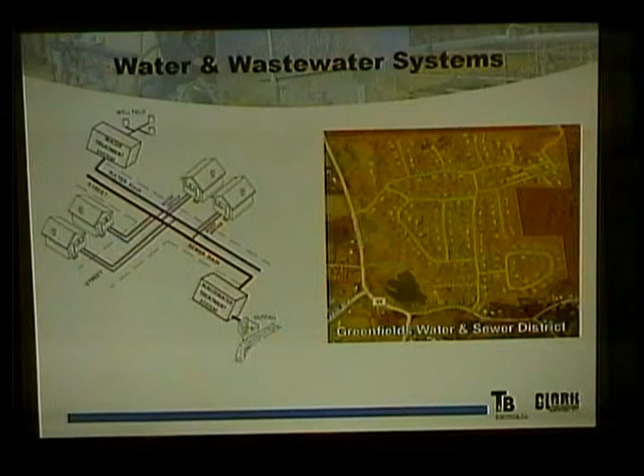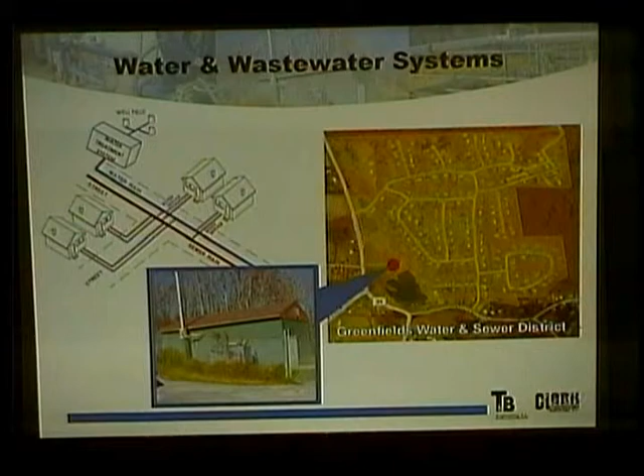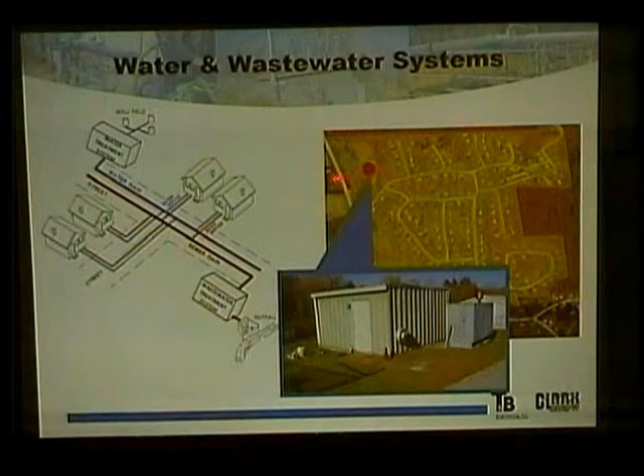Your water treatment building itself is located right off of Cream Street here. For the wastewater collection system, it includes a series of pipes that bring your raw sewage to the wastewater treatment plant where it's treated and then discharged. This is the location right along Windmill Road where the wastewater treatment plant is located.

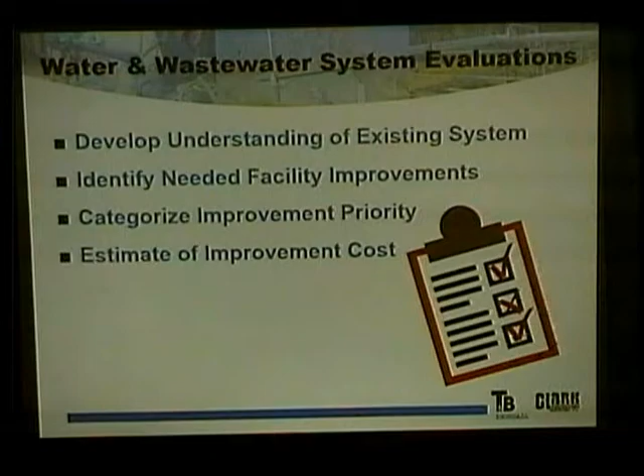So what we did for the water and wastewater system evaluations was we first needed to develop an understanding of the existing systems and what they include, identify what the needed facility improvements are for the systems, categorize the priority of those improvements, and then develop a cost for those recommended improvements.

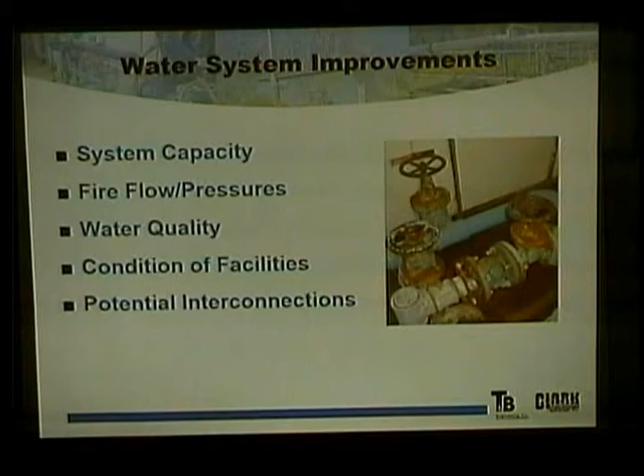On the water system side, we evaluated the system capacity, fire flow and pressures, the water quality, the condition of the facilities themselves, and potential interconnection opportunities with neighboring water systems. On the wastewater system side, we looked at the wastewater treatment capacity, inflow and infiltration, effluent quality, and the condition of the facilities.

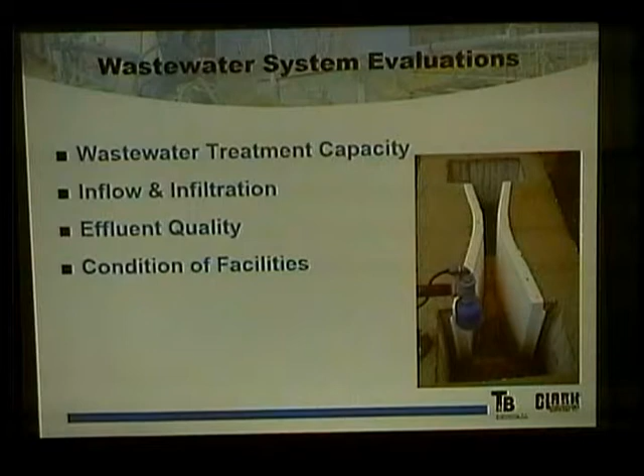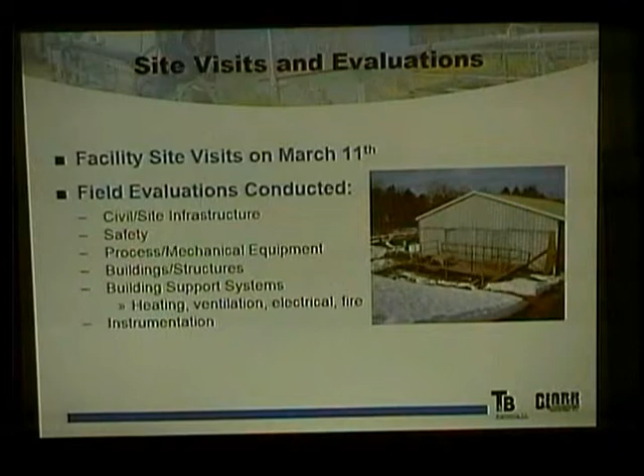The facility site visits were conducted on March 11th of 2014, and what we looked at was the civil and site infrastructure, safety, ways that safety could either be improved or upgraded, process mechanical equipment and its condition, the buildings and structures included in each of the systems, as well as their heating, ventilation, electrical, fire support systems, and instrumentation. Then we took our recommendations and categorized them into one of three categories.

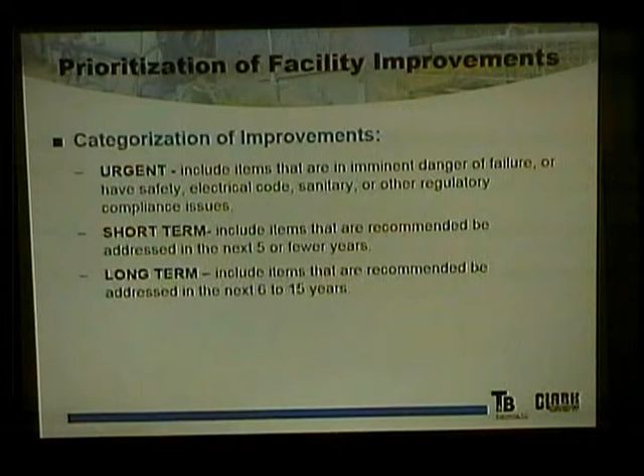Urgent being those items that we feel were either in imminent danger of failure, had a safety-related issue associated with them, or another sort of electrical code, sanitary, or regulatory compliance issue. Short-term items are items we recommend implementing or addressing in the next 5 years, and long-term items are items we recommend addressing within the next 15 years.

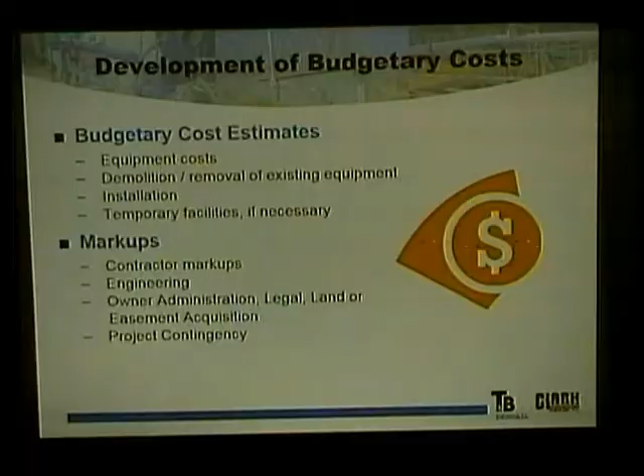For each of those recommendations, we came up with a budgetary cost for the item that included the equipment cost itself, the cost to demolish or remove the existing piece of equipment, the cost to install the new piece of equipment, and any temporary facilities that might be required during its removal and replacement. We also included standard markups that included contractor markups, assuming an outside contractor would be hired to perform the work, engineering fees for any design necessary, owner administration, legal, land or easement acquisition if applicable, and project contingency. One thing I want to note is that each of the recommendations was budgeted individually, but there could be savings realized if they were grouped together as a total project.

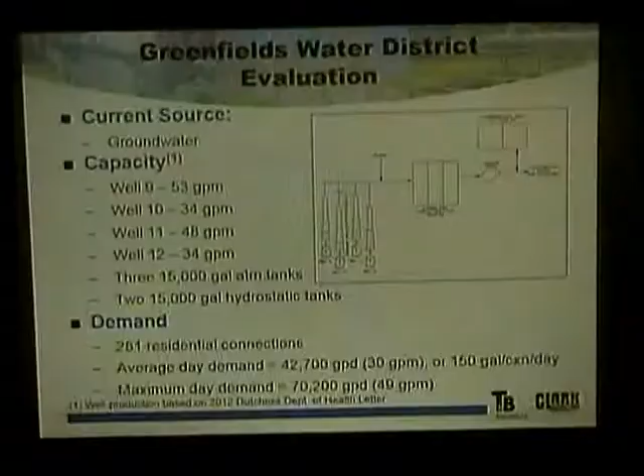So now I'm going to go into the water district evaluation a little bit. The source for the Greenfields system is groundwater. There are 4 currently active wells that range in capacity between 34 and 53 gallons per minute, with the largest well being 53 gallons per minute.

There are also 3 15,000-gallon atmospheric tanks, transfer pumps that then boost the pressure of the water into 2 15,000-gallon hydrostatic tanks. The system supplies currently 281 residential connections with an average day demand of 42,700 gallons per day, or about 30 gallons per minute. That is also equivalent to about 150 gallons per connection per day, which is pretty typical for a water system. And a maximum day demand of 70,200 gallons per day, or about 49 gallons per minute.

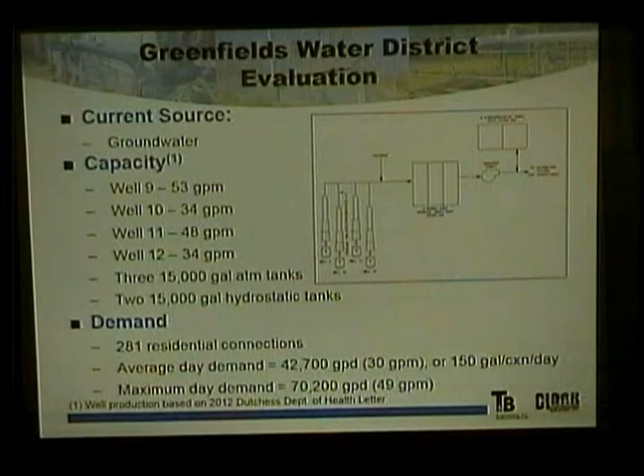In terms of what that means for adequacy of the supply, the firm capacity of the supply, meaning the capacity with your largest well out of service, is 119 gallons per minute. However, that number can be a little deceiving. According to some of the reports we reviewed, there were issues in the summertime during drought periods where the wells were not able to keep up with the production needed in the system, and there were a couple instances where water had to be trucked into the district.

Also, we've seen that over time the wells historically have decreased in production, and that's also one of the reasons why on that previous slide you saw the wells were numbered 9 through 12. There were 8 previous wells that have since been abandoned, either due to a decrease in supply or the water quality deteriorating over time.

In terms of future demands, there is potential for the expansion of the Greenfields system into the northeastern corner of the area called Greenfields East. There's potential for an additional 119 parcels in the area, and by adding those parcels, it would increase the average day demands to about 57 gallons per minute, and the future maximum day demands to about 94 gallons per minute. The other thing to note is that fire protection would be necessary for those new units.

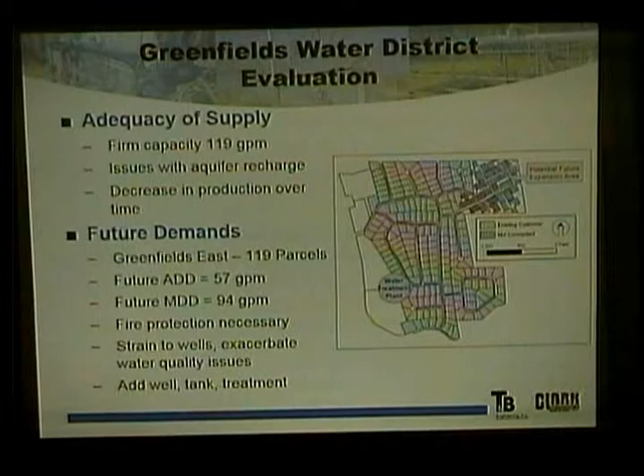We believe that based on the information we've reviewed, it would be a strain on the wells, and the additional withdrawals could potentially exacerbate existing water quality issues, which I'll go into in a second. So the recommendation would be that it might possibly need an additional well, tank, and/or treatment to expand into that area.

The distribution system itself includes over 15,000 feet of 6-inch asbestos cement pipe and 4,300 feet of 8-inch asbestos cement pipe, and 18 hydrants. The storage provided by those atmospheric storage tanks provides a little less than a day of storage at maximum day and a little over a day of storage at average day.

The pressures provided by the hydropneumatic tanks provide between 42 and 98 psi, depending on where you are in the system. In terms of fire flow, it is insufficient and is limited by the pumps that pump into those tanks and the capacity of the wells themselves.

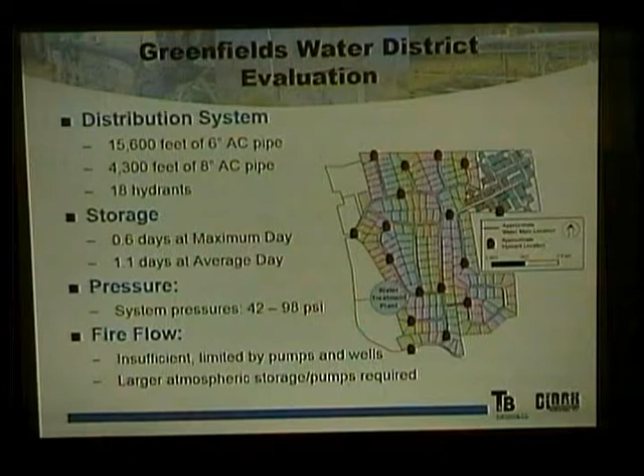There is potential to better that by providing a larger size atmospheric storage tank, which has been looked at in the past, however has been determined to be cost prohibitive at that time. And additional larger pumps would be required as well.

So a little bit about the water quality of the system. Overall, for the majority of parameters, it's good quality water and it meets most of the parameters. There were a few issues with sodium, radium, and coliform in the past. Those have been addressed. But there are recurring issues with iron and manganese, and there have been Department of Health violations in 2001, 2004, 2006, 2007, 2012, and 2013.

This is just a table showing water quality results for iron and manganese in 2013. As you can see, manganese exceeded the regulatory limit of 0.3 milligrams per liter in all but one sample, and total iron and manganese also exceeded the regulatory limit of 0.5 milligrams per liter for total combined iron and manganese in all but one of the samples.

The other thing I want to point out is that we also looked at data from 2001 through 2013, and there is a trend of increasing levels over time. Also there's a lot of information on the total combined water, which is what is required to be sampled for, but not a lot of information on the individual wells.

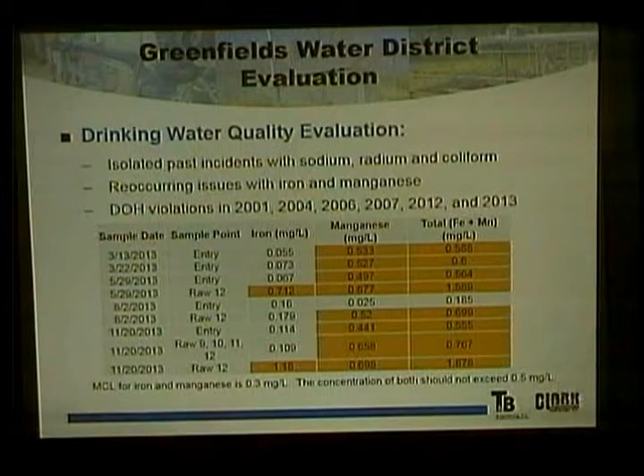Right now, the current treatment includes sequestering with phosphate. Essentially what that means is that it keeps the iron and manganese in the water, doesn't allow it to precipitate out, thus staining your fixtures and discoloring the water. However, it doesn't remove the iron and manganese from the water.

So what we recommend is conducting additional sampling for the individual wells to get a better understanding of the individual water quality for each of the wells, and possibly focusing on using some of the better quality wells more than others. Possibly piloting treatment alternatives to address the water quality issues, and possible construction of an iron and manganese treatment system, depending on how that water quality continues in the future.

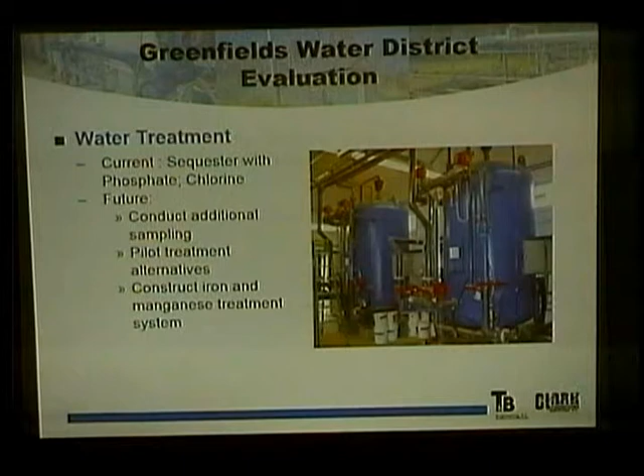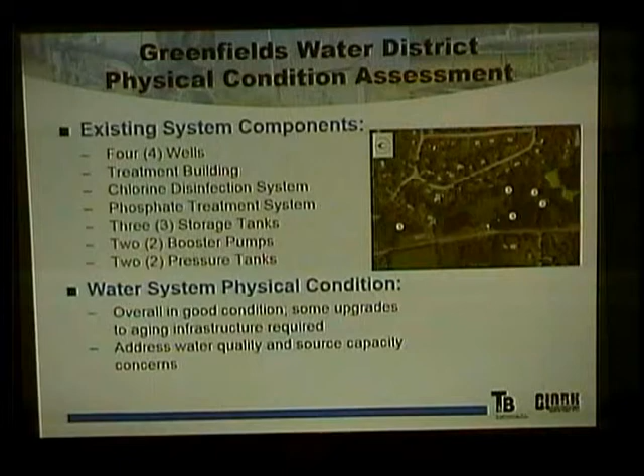In addition to the desktop analysis, we looked at the physical condition of the assets in the system, including the 4 wells, the treatment building, the chlorine and phosphate treatment systems, the 3 atmospheric storage tanks, the 2 booster pumps, and the 2 hydropneumatic tanks. Overall, the system is in good condition, but there are upgrades needed to address aging infrastructure typical for any water system. The bigger concern is addressing water quality and source capacity issues.

I'll go over a summary of all the recommendations. Operational recommendations: one thing we recommend is flow testing each well. Right now it's not clear what the actual capacity of each well is, so gaining a true understanding of what each well can produce is important.

We recommend sampling the individual wells for iron and manganese, evaluating possible treatment approaches, and considering biological or chemical filtration as two options to look at. In terms of costs, approximately $86,000 for the studies, and upwards of $1.5 million if additional treatment was added.

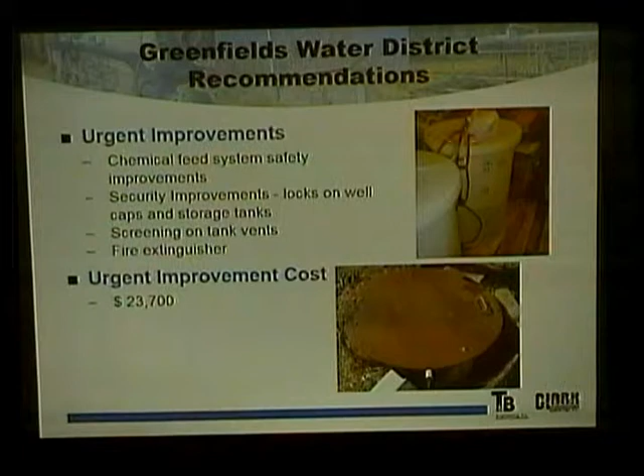In terms of urgent improvements, we recommended a few chemical feed system safety improvements, including containment for the chemical tanks and labels, and I believe these have been addressed since our evaluation. Additional security improvements include locks on the wells and storage tank manholes, screening of the tank vents, and a fire extinguisher at the treatment building, for a total cost of $23,700.

Short-term recommendations for the wells include addressing a few outstanding easement issues, regrading around wells 9, 10, and 11 to ensure groundwater doesn't pond around the wells, and instrumentation for the wells to monitor water level over time.

This would give better anticipation of when you're drawing down a well during a drought condition. For short-term improvements to the treatment building, there are structural repair recommendations including roof replacement and masonry repairs, replacement of the booster pumps that maintain system pressure along with the hydropneumatic tanks, replacement of interior piping and meters, and I believe some of that has been addressed since our evaluation, plus redundant metering pumps for the chemical feed systems, for a total of $390,000.

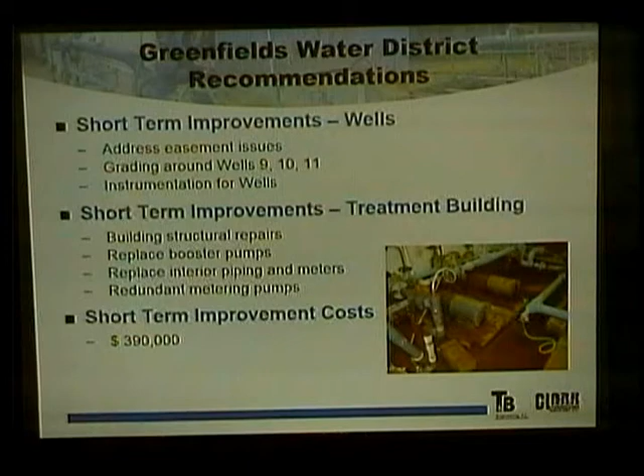Long-term improvements include replacement of the floats in the atmospheric storage tanks, replacement of the two well pumps, and replacement of the chemical tanks, for a total of $280,000 in long-term costs.

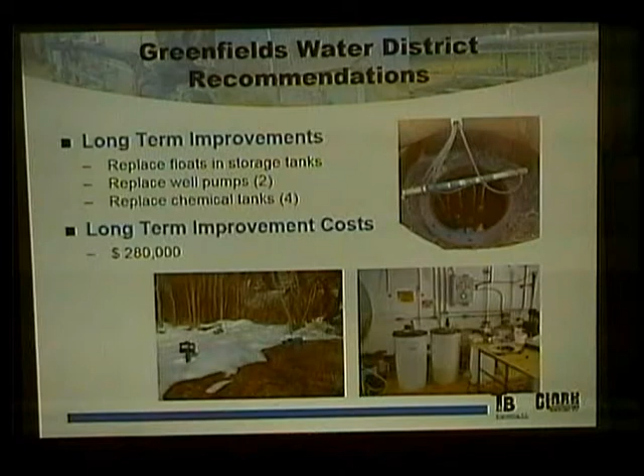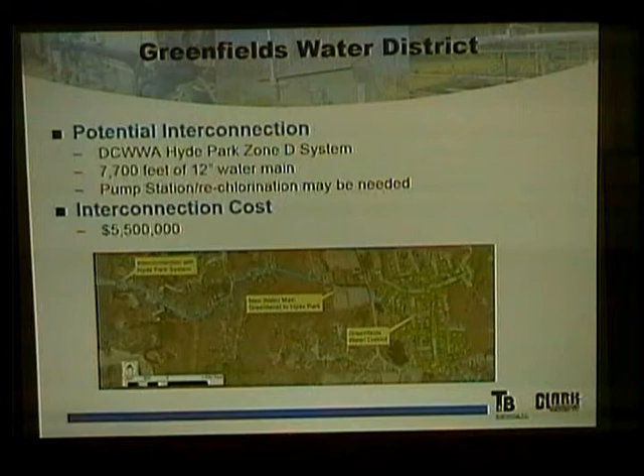We also evaluated a potential interconnection option for the water district. The nearest system is the Dutchess County Water Wastewater Authority Hyde Park Zone D system. It's over a mile away, so it would require approximately 7,700 feet of 12-inch water main, which would also need to take a cross-country route to connect. A pump station and rechlorination would likely be required as well, for a total interconnection cost of over $5 million. That's not really a direction I believe the district would move in at this point, but it's something to keep in mind in the future as source capacity or water quality issues arise.

And with that, I'll take any questions.

Okay, how about why do I have all brown water right now? I just got a text from my wife.

Hi there, I'm Jonathan Sherns. We have a mic we need to walk around with to hear questions for people online. Well, how about all the brown water my wife just texted me about right now in the house? I live on 3 Waters Edge Road. You're the expert.

Without seeing the water myself, my guess is it's probably related to the iron and manganese water quality issue. It happens every other day, day or night, all the time. We're fed up with it. If it's not filthy water, it's smell from the plant behind the house.

So, if I may, I'm Jonathan Sherns, Water Authority. What you're most likely experiencing is the iron and manganese dropping out in the distribution system. Where's it dropping? Right into my living room? Understood. Flushing is the way we're trying to remove that from the system, as well as sequestering it before it makes it out into the system so it doesn't build up.

Every other day, you get up to go to work, you have filthy brown water. You come home, you go to cook, you got filthy brown water. You want to take a shower, you're showering in filthy brown water.

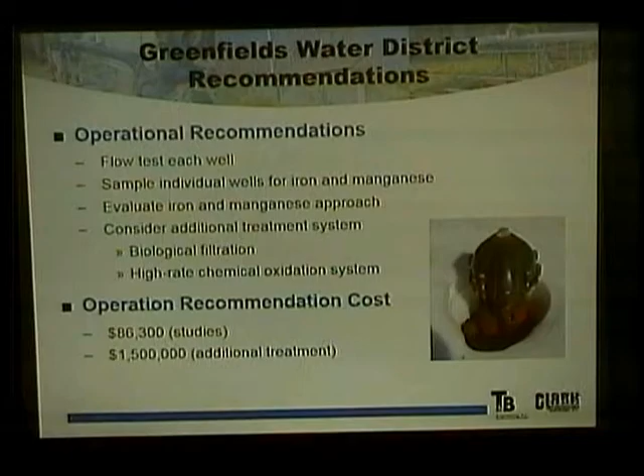This has been going on quite a while now. Understood, I'm not surprised. We looked at 14 years of data and it hasn't changed in 14 years. It's gone up over that time.

If I may add about the water - George Corolla, 11 Abbey - I had the same problem years ago, and the system had not been flushed regularly. I have a hydrant right at my dead-end cul-de-sac. Once they finally fixed the hydrant and flushed it continuously several times, my water quality improved tremendously. I don't have to change my house filter as regularly. It's not as dirty - it did get a lot of sediment out of the system. I'm sure that's part of the answer.

I experienced the same thing. It's been a lot worse now.

So one of the efforts made by the town operator is to repair the hydrants in the system over the last year, and at this point all the hydrants have been put back into service. They've been doing monthly flushing during the summer months - probably about 3 times throughout the summer, actually, last year. Not all the hydrants were functioning then. The last flush, which was sometime in September, all the hydrants were actually working, so that was the last time we did a flush. We'll probably be ramping it up more next year now that all the hydrants are working. I don't know that it'll be monthly, but it'll be based on how bad they are when we do it the first time, which will be as soon as the weather breaks.

There are certain improvements that need to be done immediately: booster pumps, building repairs, roof masonry, paint, doors, frames, and replacing panel boards, which are the electrical panels where the circuit breakers are. These items total $184,000. Keep in mind these things will need to be done if you're going to stay with this current water treatment plant.

If we go to the next slide, there is another level of treatment that could be added, as another module. There are multiple different ways to go. It comes with a price tag of about $1.5 million. Those necessary improvements would still need to be done, bringing you to $1.7 million.

With the iron and manganese treatment, if we were to go to this higher level, we would need to do pilot testing as well as construct the actual treatment to remove the iron and manganese. It would make the most sense to hold off on those necessary improvements until we decide whether the current sequestration treatment process works for the system if modified, or if it would be possible to move forward and combine that with a new treatment unit.

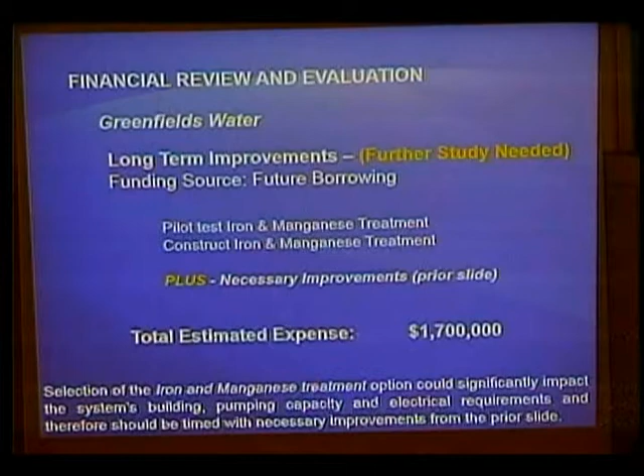And now I'd like to turn it over to Bridget Barkley, who will speak to the financial items of the system.

No, I'm just, the first two slides that you ran there, that particular slide.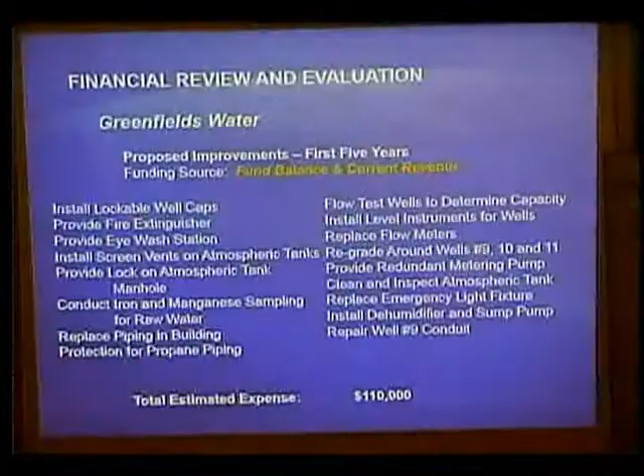Most of those items there, I'm kind of baffled, because that's something you do regular maintenance. You don't wait 5 years to do things like that. No locks, no caps on the well, and a lot of things like that.

A fire extinguisher, right. So what we've done here builds on the engineering evaluation. These aren't things different than what the engineers identified. We're now talking about how you implement them, where you get the money from. So we combined items that the engineers identified as urgent and that needed to be done over 5 years to look at: does the system have fund balance to cover these? How much can you do through your operating budget?

So you're absolutely right, there are things on this list like the well caps, the fire extinguisher, and the eye wash station that you just do right away, using part of the system fund balance. Some of the other things - right away, I would think that should be in the station already. Right, as a part of safety.

And there are items identified through the engineering evaluation that have already been done. All of this is a work in progress. Things continue to happen as time passes. The town is still operating the systems. VRI is there on a daily basis, looking at all these issues. We're working with the town on these as we move forward.

So by the time, if the town decides to go forward with the transfer and the authority takes us over, a lot of these will probably be done. It really was the value of having the money through the grant to do a complete evaluation of the system that enabled people to understand the system as a whole, what needed to be done, and how to move those things forward and get the work done.

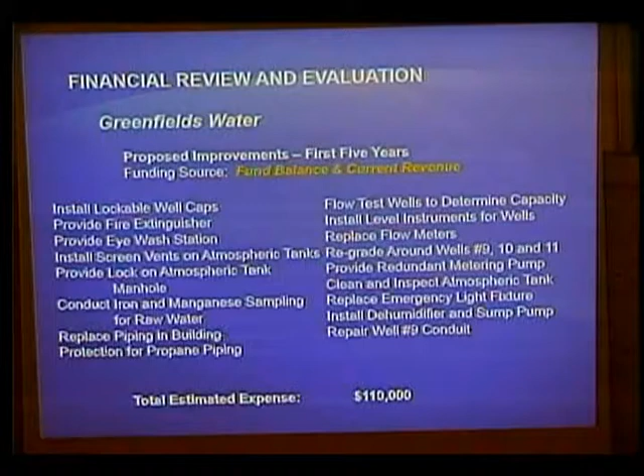Question for you - I'm sure we need a tremendous amount of work done within both facilities. If we transfer ownership, if the town transfers ownership, what stops or prevents Dutchess County wastewater from coming in and saying we have to do $4 million worth of improvements, and you have to pay? And when does it get to the point where I can't afford to stay in my house any longer? And where are the checks and balances on how much is spent and what it's spent on?

Sure, so lots of checks and balances all along the way. Like the town board, our board is a public organization. They're subject to open meetings and freedom of information law. As I indicated previously, we provide customers information on what's happening with the systems. We work with public advisory groups.

If we're talking about improvements funded through the operation and maintenance budget, that budget is developed and approved annually by the authority board. We develop that budget as a draft. We provide it to elected officials in the town where we're working in any of our systems, to the elected officials at the county level, so your county legislator. If you have citizen advisory groups, we present the draft budget to them.

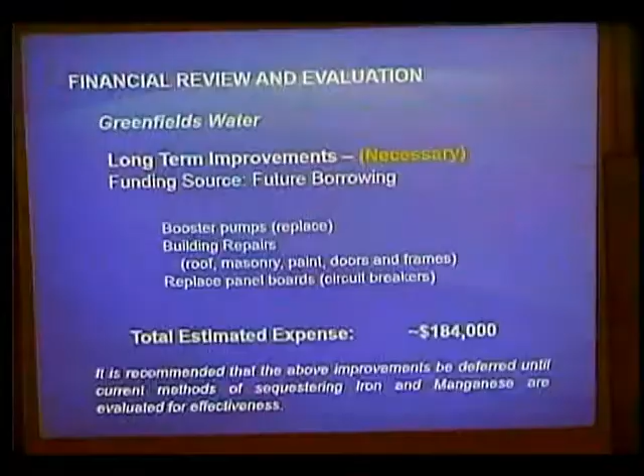So to get back to the financial evaluation - what we did was look at the overall financial health of the system, just like we looked at the physical condition. What's the rate structure? How much money is that generating? How does that compare to the expenses? Is there a fund balance available to cover unexpected expenses and to fund some of the improvement items that have been identified?

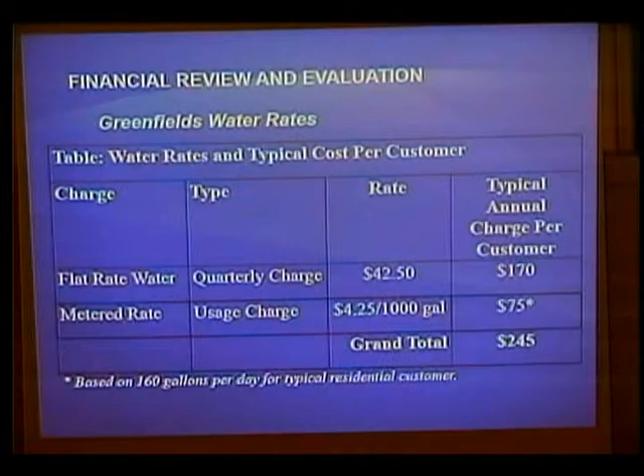So we start with your current rate. Right now it's a flat rate of $42.50 a quarter, plus a usage charge of $4.25 per 1,000 gallons. Based on average water use, a typical customer in Greenfields Water is paying about $245 a year for water. We looked at the budget for the town - revenues and expenses over a number of years, actual revenues and expenses for 2011, 12, and 13, the budget the town adopted for 2014, where they expect to end 2014, and the budget adopted for 2015.

Richard, I'm sorry, could you just - I know we've sat through a number of presentations - what is the average cost per year for water?

Based on figures that the New York State Comptroller puts together - there is not a lot of data collection in New York State across all water and sewer systems, but there is data collected by the Comptroller, who has to approve the creation of a new district. They collect data over a number of years on any new systems coming in, and they're using an average cost right now for a typical household of $862 a year for 2015. So Greenfields is well below that.

So we look each year at what was the fund balance at the beginning of the year, and what was the total amount of expenses.

We've consolidated some of the individual lines in the budget to make it easier to see the big picture, including what the revenues were and where you ended up as far as the fund balance.

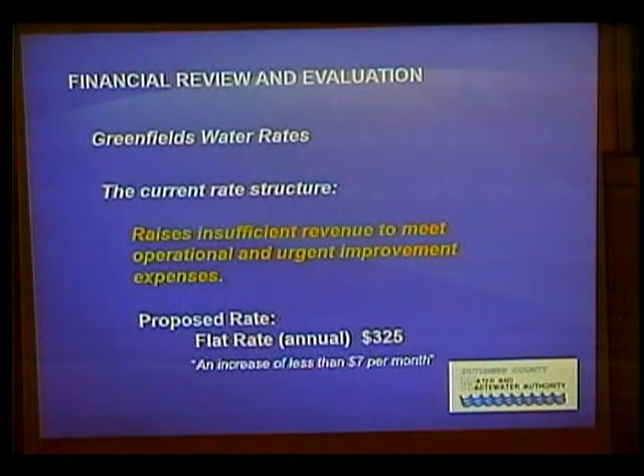The other items that we talked about were the long-term improvements, or the longer term improvements that are needed. We do not see those as being able to be funded out of the fund balance. Again, we were looking at about $180,000 for the booster pump, the electrical panel work that needs to be done regardless of what you do on the iron and manganese, and then the potential that you could be spending as much as $1.5 million to address the iron and manganese problem if it's determined that additional treatment is needed, as opposed to improving the sequestering system that's there.

The best way to fund that is through long-term borrowing. You're making an improvement to the system that has a useful life that will benefit people for the next 10, 20, 30 years. So it's an appropriate and a more affordable way to fund those kind of increases.

Generally, what the authority does is, when we're looking at capital projects like that, we'll do a short-term BAN, a one-year borrowing to cover the cost of doing the engineering, to get the system designed, go through the approval process. And then when we're in construction, we roll that into a long-term borrowing. So at that point, you're borrowing the amount that you know that you need to do the project, and spreading that over the long term.

We do seek out, and very often are able to obtain low-interest loans for improvements to water and sewer systems that we own and operate. We do, like anybody does, try for grants. I will tell you, there's not a lot of grant money out there for water and sewer, and that's not something that's just affecting people in Dutchess County, New York State. It's throughout the country. We are significantly underfunding our infrastructure improvements, but we've been successful in getting low-interest loans through really the major funding program that's out there. That helps reduce the impact of the costs on the ratepayers to pay for these improvements.

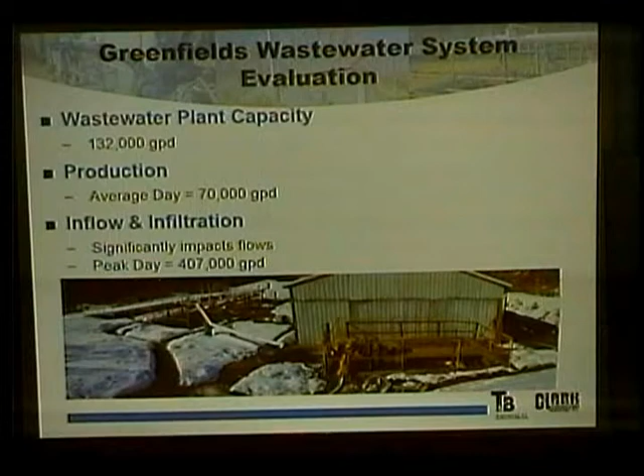So I&I, what is that? With everything else, sewer systems get old over time, and groundwater can get into the system through cracks and holes in the pipes and manholes—that's called infiltration. On accident, or sometimes on purpose, stormwater can be put into the sewer system. That can be through catch basins, accidentally connected sump pumps in basements, or even through manhole lids that have perforations in them. And this is called inflow.

So why do we care about these items? Huge flows in the systems damage pipes. They damage the biology in the treatment plant. They cause the plant to flood. They cause permit violations, which can equal fines, so that's a problem. And in general, you're paying to treat clean water at the plant. So we want to avoid stormwater getting into our sewer system. It's really important.

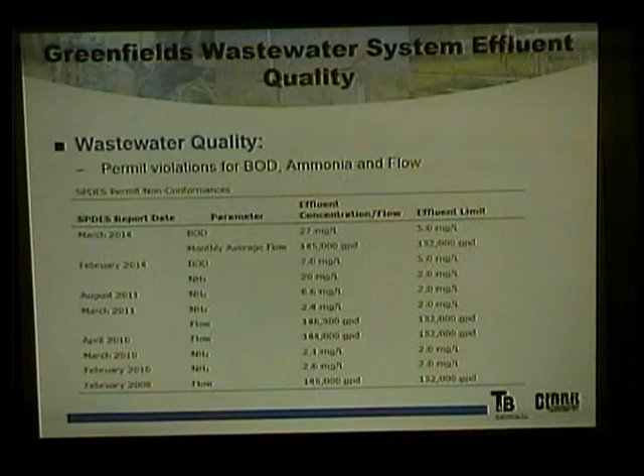So we also reviewed the quality of the treated wastewater effluent, and there were several effluent violations from 2008 to 2014, which is what I'm showing in this table here. The biological oxygen demand and ammonia levels were the quality issues in the effluent. So effluent means the wastewater that gets discharged to the stream. Those were higher than permitted, allowed in the discharge. And as expected, based on what we just discussed, there were several times that the flow level was violated and above the permit capacity. So that certainly is an issue.

And finally, we completed an evaluation of the physical components of the system. The wastewater system includes about 18,500 feet of 8-inch sewer with 78 manholes, and a wastewater treatment plant that has a headworks, primary clarifier, rotating biological contactor treatment units, secondary clarifiers, an aeration basin, sand filters, a disinfection system, and a flow meter. This is actually, for a plant this size, quite a nice list.

Around the same time frame, there was a different style of plant built frequently without primary clarifiers that can be even more troublesome as they get to this age. So it's a pretty complete plant as far as unit processes. In general, both the collection system and the treatment system are in fair condition.

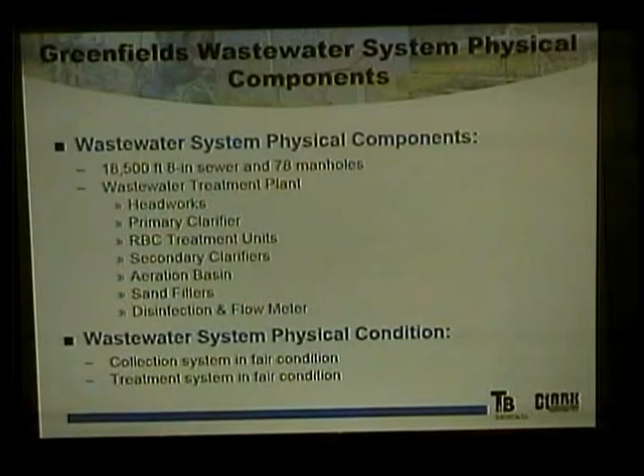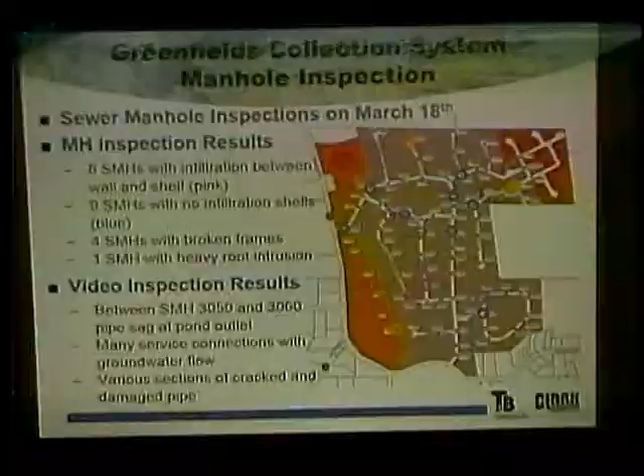The collection system evaluation was completed on March 18th, and what you might have seen was people around in the street looking down manholes - that's what we can do, is look in the manholes. The pipes you can't inspect as easily. What we found was 8 manholes with heavy infiltration through the walls, circled in pink, and 9 with no infiltration shells.

What you have in the system are plastic lids under the manholes to stop stormwater from getting in, and there were 9 manholes that had lost their shells one way or the other - those are circled in blue. 4 manholes had broken frames that can allow water to get in, and 1 manhole had roots growing right through it, circled in green. If roots can get through, water can get through. So we identified all those problem locations.

As a result, just with some historical knowledge and some of the manhole inspections, we TV inspected the lines that are highlighted - let me show you with this. The lines shown in yellow, we actually took a camera and ran it through those lines.

What we found is, this picture doesn't show it, but there's a pond right here. Right through this section, there was a very heavy sag in the pipe, conveniently right where the pond outlet crosses, but unfortunately we couldn't get a camera through there. However, that's definitely a suspect location - wastewater pipes all slope, they've got to flow downhill, and if there's a sag in the pipe, things are not flowing as they should be. That's an area we need to come back to, and it's going to take some additional investigation or probably digging up to find out what's going on in that section.

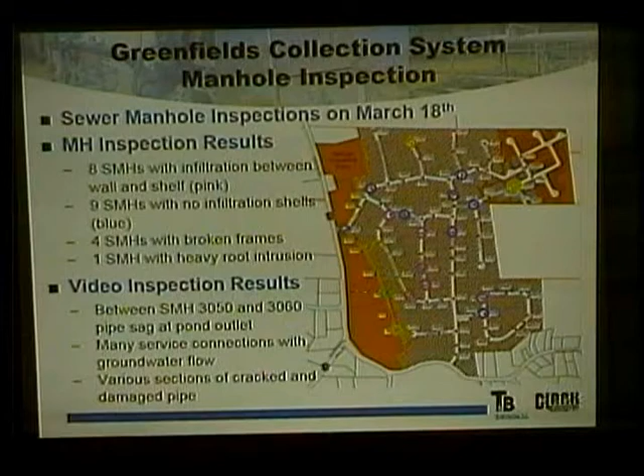We also identified a lot of service connections that had pristine, clear flow coming out of them, and it was the middle of the day with no cars in the driveway. That typically means there's groundwater getting into those connections and flowing through. We also identified various sections of pretty cracked and damaged pipe - again, over time it's aged and it's not aging gracefully, let's say.

Based on our inspection of the collection system and then our inspection of the plant and all those items we talked about, we identified some urgent improvements. There was a question asked about this, and yes, one would hope we didn't see any of these urgent issues - we want fire extinguishers and eye wash everywhere, but unfortunately that wasn't the case. While our main goal is to identify equipment and capital issues that need to be fixed, we also note down where we're concerned about safety issues and shared that with the town and the Dutchess County Water and Wastewater Authority.

So there is - the urgent issues don't involve the collection system, they're mainly at the plant. The plant is missing a lot of safety signage. A lot of the tanks lack appropriate railing with no mid-bar, so it'd be very easy to accidentally fall in, and some tanks don't have any railing at all. There are missing equipment machine guards and emergency disconnect switches to stop equipment if something bad should happen. The main treatment building had no open secondary means of egress.

There's an underground fuel storage tank under the generator that we have quite a few concerns about. At the dosing tank control panel, the operator actually had to manually switch the motor starter on a high voltage system, so we thought that seemed like something we should fix quickly. Also, the chemical system lacks secondary containment, so if there's a spill, there's nothing to stop that. Those were our urgent issues, as well as eyewash.

As far as short-term improvements go, we had recommendations for the collection system. Within the next 5 years, we recommend some easements be straightened out and obtained if necessary, and that the manholes we noted in really poor condition be sealed and repaired, especially the ones with clear I&I coming through them. We really think an I&I study should be initiated to get a handle on where all this extra flow is coming from, because it's clearly limiting your capacity to treat your wastewater appropriately.

For the treatment plant, for the next 5 years, the first recommended improvement is pretty simple: development of a sludge tank and sand filter operation plan. We think whoever's operating the facility should maybe talk to the design engineer again, since some of those BOD and ammonia problems, and the methods of handling sludge, could be made a lot smoother and probably weren't being handled per the design engineer's recommendations.

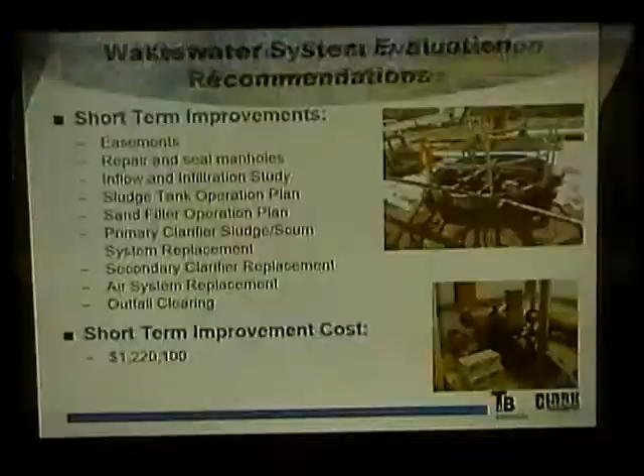The sludge tank is pretty brand new and in really good condition, but it seemed to be shocking the system and maybe causing some die-offs. So we just recommended a plan be formed on what the right O&M is for those two components. That's a really good place to start.

Covers for those tanks? Pardon me? Covers for those tanks. The sand filters? No, there's outside pits. Well, we could talk about that - that's definitely coming up. Hold on, we'll get to that quickly.

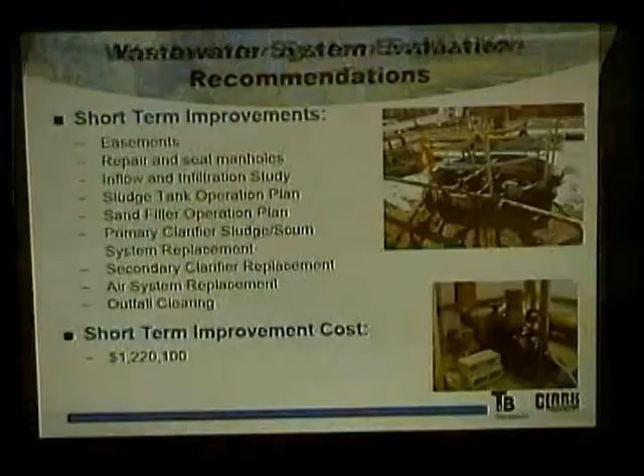The sand filters get overgrown often, so having an O&M plan for them is pretty important as well.

The primary clarifiers suffered a frozen line in 2014, and the sludge line was significantly damaged. It's been repaired, but the method of removing sludge from the tank is called an airlift - it's not pumped, it uses air to remove the sludge. That's not a recommended method for primary sludge removal, which is where this takes place. So we really recommend the primary clarifiers have sludge pumps instead of the airlift system, and that should be a short-term improvement.

The secondary clarifier tanks are shown here. They're original equipment from 1969, steel tanks, and they're not within design conformance for size for what they need to do. We really recommend a plan be started and designed to replace these tanks, because they're significantly rusting and are going to fail if a plan isn't started to get them replaced.

The air system is also quite old, and the problem is there's not sufficient air at the plant to run all the things that need to be run. The sludge tank air is often continuously aerated, and that's what helps with odor control. But if they need the air somewhere else in the plant, the sludge tank gets turned off. The blower systems that are there are not suitable - there's just not capacity to run everything that needs air at the plant at the same time.

The day we did the inspection, there was air leaking out of a joint in the valving. I know that's been fixed since, but there's just not sufficient capacity to keep that tank aerated, and if it's aerated, you don't have the odors. I know keeping that tank with air has been a priority of theirs, but if you need the air somewhere else, you can't do that. So replacing these blowers with new high-efficiency blowers is something we're recommending as a short-term improvement.

Now, everyone said this, but I'll say it again: we looked at every single project as a budgetary item done by an outside contractor, done out of house, with contingency included. The sum of all these projects together is $1.2 million. However, certainly if different projects were addressed together, or in-house, and there's the capability to do some of that, costs would be reduced. But our job was to isolate a cost per each item as if it was done outside.

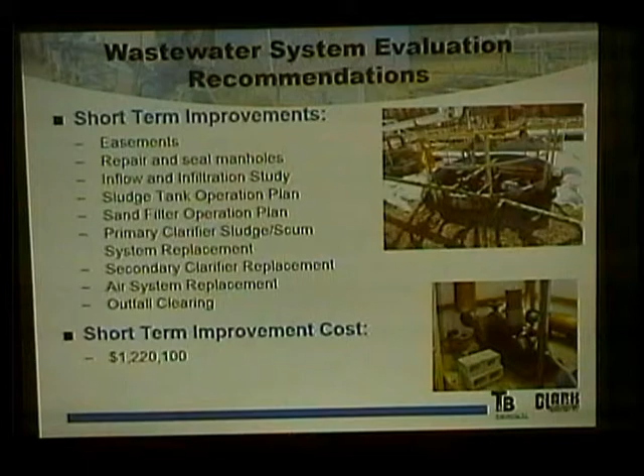I also have outfall clearing listed, but I think that's been done. There's a lot of brush on the way to where the pipe discharges to the stream, and that was cited by the DEC in one of their inspections.

So, long-term improvements. I'll get my notes here.

For the collection system, we'd like to see within the next 15 years ongoing continued manhole and pipe repair. We put in a placeholder number for repairing some pipe identified in the I&I study we recommended under short-term improvements. So that's really what you need to focus on, is if there's a good way to identify where that study can focus the money to do pipe repair and try to get some of that stormwater out of the system, because that's just going to help everything.

Within that cost, there's various minor facility repairs that are smaller and not significant projects. Headworks improvements - the headworks is the first thing flow comes into in the plant, and currently we have a grinder that takes care of that. That structure actually floods itself, so the concrete wall needs to be raised about 6 to 8 inches to stop it from flooding when heavy storms come through.

However, what's a big problem facing a lot of wastewater collection systems - this is my very brief PSA - is baby wipes. Baby wipes get ground up, but they never disappear, and they end up clogging other parts of the plant. We found a lot of baby wipes. They do not go away. They should never, ever be flushed. Don't flush baby wipes, they cause havoc on your plant.

The problem is, though, if everyone in this room stops doing that, they're still going to keep coming to the plant. So as the grinder reaches the end of its service life, we recommend switching to a screening type system. Instead of grinding up the rags that come into the system, it actually removes that debris and takes it out of the flow, so it's not continuing on to the other parts of your plant.

The primary clarifier equipment - the primary clarifier is concrete, but the equipment is original from '69. The fact that it's still operating as good and as reliably as it is, is great, but you've got to start assuming within the next 15 years that equipment is - well, it's there already, it's doing well, but it's got to be on the radar that it's going to go down. The tanks themselves are in good condition, but the mechanical equipment is going to need to be replaced.

The treatment building - so this is the treatment building down here. These are your RBC units, these big cylindrical objects that dip into wastewater and come back up, and biology grows on them, and that's what treats things. However, this is a wood and plywood building, with no ventilation or heat, so there's very, very high humidity in the building.

So that's what we could do - we could vent it, but then you'd have to heat it, and that creates a really big utility cost. So we recommend that this building's at the end of its life. It should come down and just use fiberglass enclosures over the RBC units instead of trying to house them in a building. However, the other half of this building has the chemical system, which also has damage in the area where the chlorine is, and that should go into a much smaller building meant to house chlorine.

You can always put up a little prefabricated shed for the yard maintenance equipment. So getting away from this building, which really does not have a great environment for the equipment in it, is what we're recommending.

The sand filters, we talked about them before. You can see this center piece right here is literally split open - that's a concrete circle, and they're cracked wide open, several of them. So there are improvements to the sand filters that need to be made. Some of this is pressure treated back here, and some of that's fallen in. And sand has a limited life, so within 15 years, media replacement for the sand filter is going to need to take place.

The control building needs a new roof. That generator's got to go. Some of the panels inside, some of the lights - so there are improvements to the control building itself.

So again, looking at each of those projects independently, our total long-term cost for the system is, we'll say, $1.3 million.

And I think that concludes what I'm presenting.

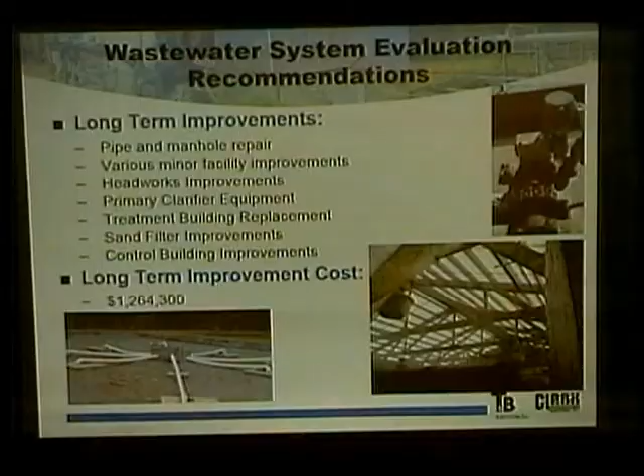Renovations I'm sure are needed, but do they really need to be done right away. Are these functional items we have that can be done over time, or do they need to be done right away? I know there's a long and short term of it. Yeah, so, and I think that's what I've tried to explain, where some of the things are.

The secondary clarifiers, I think we have some other pictures of them up. Here's your challenge, it's your risk versus reward. If you plan on replacing the secondary clarifiers, get a design and get them in, you have money you're going to spend. However, if the secondary clarifiers develop a hole in the bottom or their mechanisms stop working, the cost impact is going to be that plus, oh, now we really need to start replacing them. So within the next 5 years, planning to replace your secondary clarifiers would be a pretty high priority item if it was me. Steel tanks rust, and definitely steel tanks installed in 1969, so.

And what was great about the study, remember, this was a study, and we had the engineers go in and say, okay, best case scenario, if we had all the money in the world, what needs to be done? And they looked at the whole system. You guys really have a complete workup of the system. And that's where we look at what the short term is.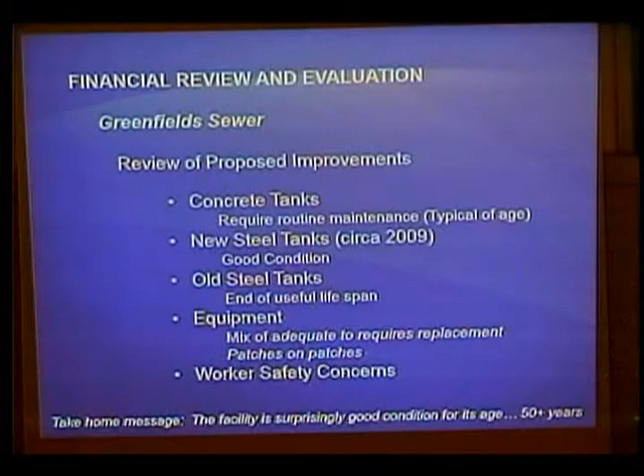Similar to the water system, we have a long list of items that need to be corrected. As was mentioned before, some of these things are somewhat straightforward: eye wash stations, signage, construction of railings on tanks to make sure people don't trip, fall, hit their heads, and drown. Machine guards so that ties don't get pulled into machinery and people are damaged.

Grinder disconnects. At the headworks of the facility, there is a unit that grinds everything up and then passes it through so that those things can float or sink and be dealt with appropriately. There's no disconnect, so the operator has the potential to fall into and become a part of your system, unfortunately. So we'd like to address that.

Exterior lighting. At times, the facility needs to be operated in the evening or after hours, and so lighting needs to be ensured that it's adequate so that they can do the things they need to and not have safety issues of falling into tanks.

Certain panels and motors were mentioned. High voltage units. There's potential for the operators to have issues, and so we've asked the contract operator to look at the system and understand what could be done to improve within the panels that we have now and move that forward.

Egress from certain buildings. If someone's in there and they can't get through the original opening, the door, they need to be able to go out a different door. Building's on fire, you need to get out. So a second egress needs to be added.

The air piping system and the valves in the system. There are pipes that are very old in the system and they need to be repaired, patched. In many cases, they have been. There are still some valves that need to be addressed. Excess air could be found by fixing these leaks, and then it could be applied to other operations. It does not necessarily mean that the blowers that are on site would necessarily run the entire facility.

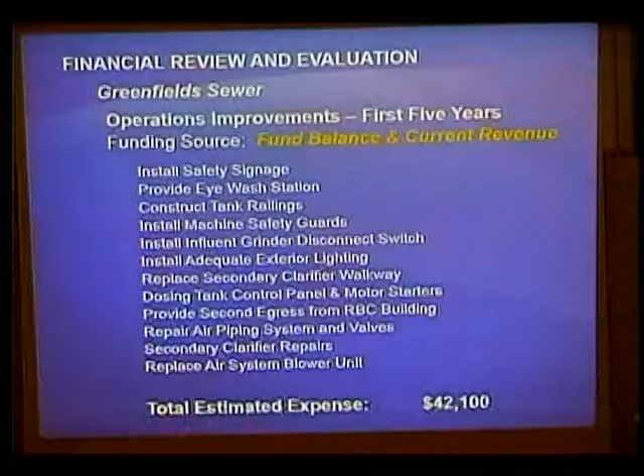Secondary clarifier, it's been mentioned many times tonight. It is those little round tanks. They help to entrap the solids, they float or sink. They are original to the system and are in very bad condition and need to be replaced. Additionally, there are certain catwalks over the top that you may have noticed in some of the photos along the walls, as well as in the slideshows, that show where it would be dangerous for an operator to enter the particular module, and those would need to be replaced.

And then air system blower units. One has actually been replaced recently in kind, with the same make and model or a similar one, and we would recommend that the other one be replaced. The totality of these items that would be done in the first 5 years, some sooner than others because they are very important, is $42,100.

Capital improvements. There are two segments to your system. One is your collection system. It's been mentioned several times tonight that there's inflow and infiltration. That needs to be evaluated so that we can target those problems and quickly address them to reduce the inflow and infiltration coming to the plant. That harms the ability of the plant to treat the sewage coming to it. There's the known sagging pipe section that needs to be repaired, as well as manholes that have already been identified that have leakage and can help to alleviate some of that inflow and infiltration into the plant.

Treatment plant improvements: the primary clarifier equipment needs to be replaced or improved, the secondary clarifier needs to be replaced entirely, and the air system needs to be replaced. There are certain easements within the system for both the collection system and the wastewater treatment plant that need to be dealt with at a later date. The totality of these items is $1.2 million, and they would be funded through BAN and bonds.

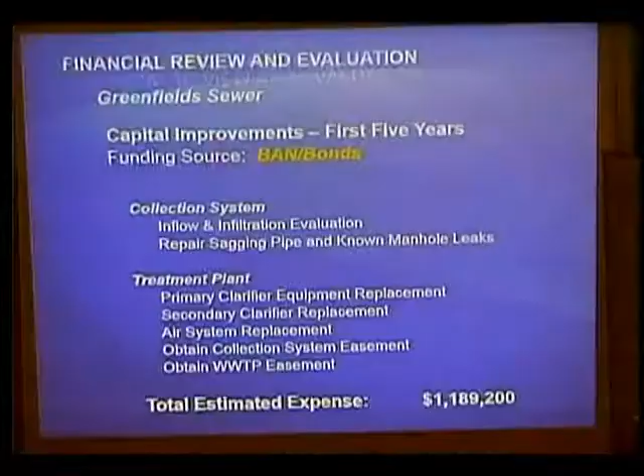Typically, the term is tied to the life expectancy of the infrastructure. So if we're talking about a treatment plant component, it would be in the 20 to 30 year range. While if we're talking about a collection system using modern piping, it could be in the range of 30, 50, sometimes 80 years. It depends on the soils and the type of pipe. When the Water Authority does projects, we try to use the best materials so that we can keep that lifespan out there and make it worthwhile, and not have to go back and do it again.

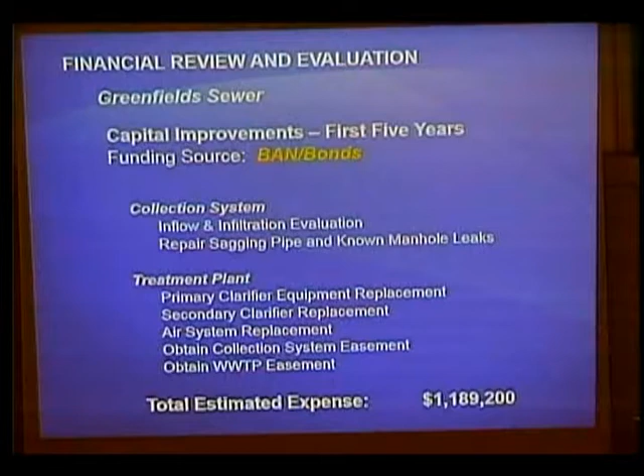And so at this point, I'd like to invite Bridget up to address the financials of the system.

So again, we did the same kind of evaluation with the sewer system on what the overall health of the system is. Have the revenues been sufficient to meet the expenses? Is there a fund balance? Is there money in the bank reserved to use to address urgent and short-term items or unanticipated expenses?

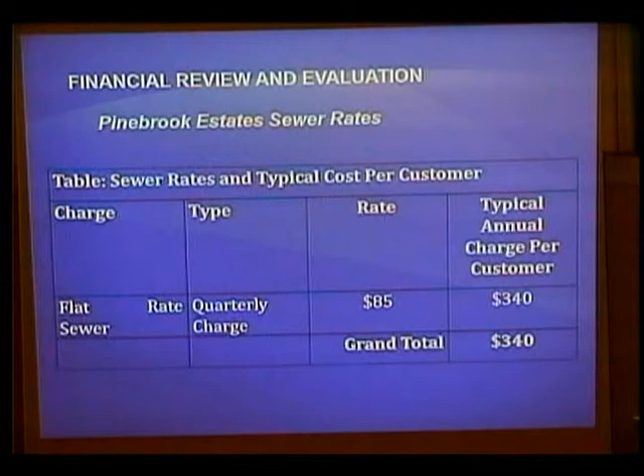So starting with your rate, it's a flat rate system. Everybody pays $85 a quarter, $340 a year for each customer. No, we cut and pasted when we made the slides, but that is the rate for Greenfields sewer. That's the Greenfields sewer rate. Sorry about that.

So again, we did the same multi-year evaluation. How much money was in the bank available for contingency for known repair or improvement costs each year? What were the expenses? What were the revenues? Where did the system end up with fund balance through the 2015 adopted budget?

Let me go back one second. The $340 a year rate, just again as a basis of comparison with that state comptroller number: the state comptroller's average for new systems over the past 3 years in New York State is $706 a year. So just to give you a ballpark of where you are relative to other people with their sewer expenses. There has been a significant increase in the expenses for the system over a couple of years.

2013 was an anomaly because there was a $92,000 expense that was a transfer to the town. It was determined in an audit that the sewer district owed the town of Hyde Park general fund $92,000. So the system took a big hit that year that brought down the fund balance, along with the cost of significant repairs to the system.

So the end result is that the fund balance is being drawn down to cover these ongoing expenses for the system. And as we talked about with the water system, you want to evaluate that based on the urgent and short-term improvements that you know this system needs to address, as well as keeping some money - essentially your rainy day fund - should you have an unanticipated expense that you haven't budgeted for.

We looked at, again, an apples-to-apples 2015 operating budget under the authority. All told, at the end of the day, we're looking at expenses. Oh, I'm going to go back just one second - there was one other thing we wanted to point out.

Based on what the revenues for the system are, it's a flat rate fixed system. So other than the extent to which people are paying penalties and interest if they're paying late, you know what your revenues are going to be. They're about $95,000 a year, based on that flat rate. So there would need to be either a further drawdown on the fund balance or some increase in the rates to generate the dollars to cover what are anticipated expenses for 2015 under the town.

We looked at, again, expenses under the authority. There are a couple places where we see the expenses differently. We've budgeted higher for the administrative costs for the system for more aggressive involvement in dealing with these urgent and short-term improvement items - things like implementing that sludge tank and sand filter operating plan that Darlene pointed out was needed. We're looking at sludge hauling costs a little differently than the town, in terms of historically what those expenses have been. So all told, we would project total expenses about $12,000 higher than what the town projected.

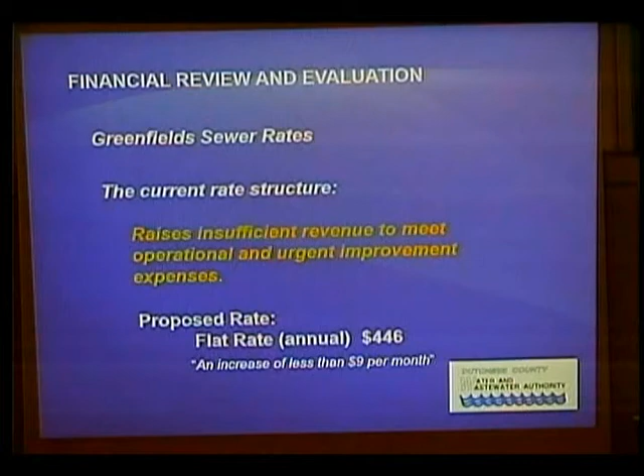Capital improvements - again, as Jonathan pointed out, about $1.2 million in improvements that we think should be bonded - and we would take the same approach of looking to do an initial short-term borrowing to cover the engineering for those improvements, and then roll that into a long-term bond when you know what your construction costs are going to be, financing that over a 30-year life of the bond. Again, we do look for funding that's available to help offset these costs.

With Greenfields sewer, as well as with Pine Brook sewer, we worked with the town to develop applications for funding through the state's Clean Water Revolving Loan Fund program, which provides low-interest loans for wastewater improvements. The engineering evaluation that was done with this grant money was sufficient to meet the requirements that program has to have an engineering report in order to be put on their annual list. So the improvement project for Greenfield, as well as for Pine Brook sewer, is on the list of eligible projects to be funded in 2015 through the revolving loan fund program.

Again, it's a subsidized interest rate program. The extent to which the project would actually get the money or not depends at the end of the day on how many projects are eligible, what the cost of those projects are, and how much funding is available through the program. But at this point, you're at least on the list and eligible for that program. So we would continue to work with the town over the next couple months to see if there's opportunities to move that project up the list and increase its likelihood of getting funding.